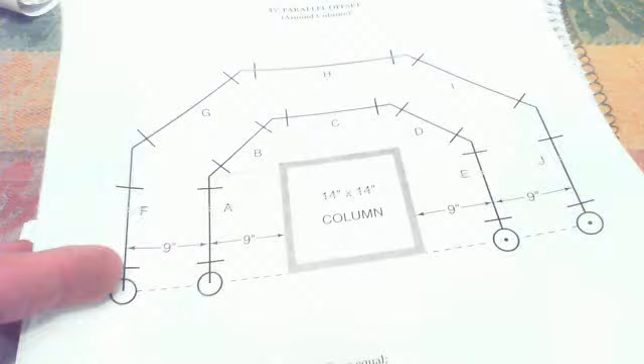So for this video I'm going to go over shop projects 8 and 9, and for this particular one it had a couple good things about it, in that some of these dimensions, you didn't have to go figuring out every single one individually, so some of them were equal, and that helped out a lot.

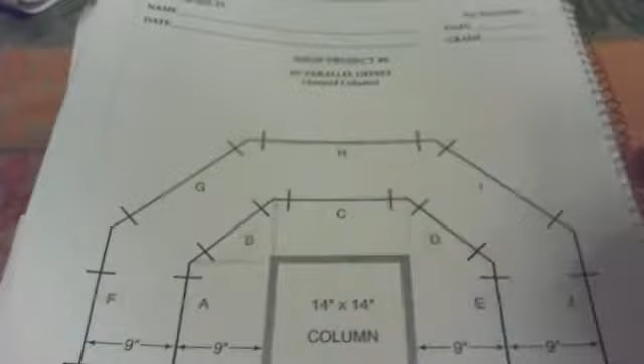So right off the bat, A, C, and E are 14 inches because the column lines up with the center line of the fittings, so therefore those guys are all 14. And then for B and D you take 9 inches. Okay, you got a 45 times 1.414, and that's how we get those answers there. So B and D are the same, 1 foot and 3/4 of an inch.

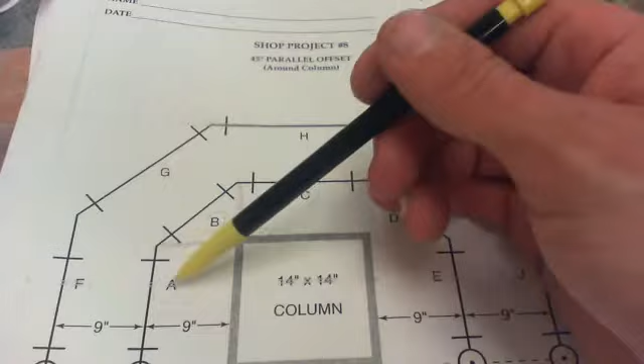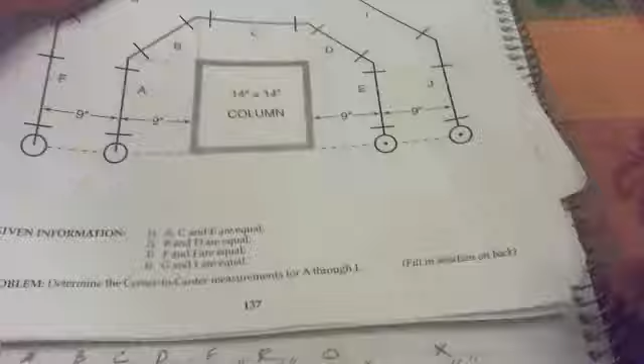Okay, and then we need to find a step ahead for these other ones out here, and of course you know that we gotta go 9 times 0.414 gives us a step ahead, and so for F and J we add 1 step ahead for those, right? So 14 inches plus 3 3/4. So 3 3/4 is a step ahead, and add that to A, you get F and J.

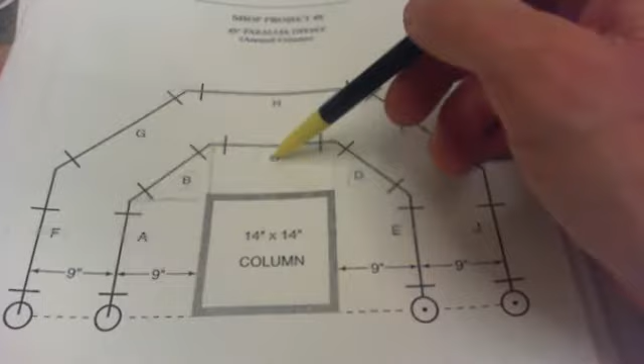And then for G, you take the step ahead times 2, 3 3/4 of an inch times 2, and add that to B, and that gives you G and I. And then for C, you take the step ahead times 2 and add it to C, and you get H. So that's that. That one's done.

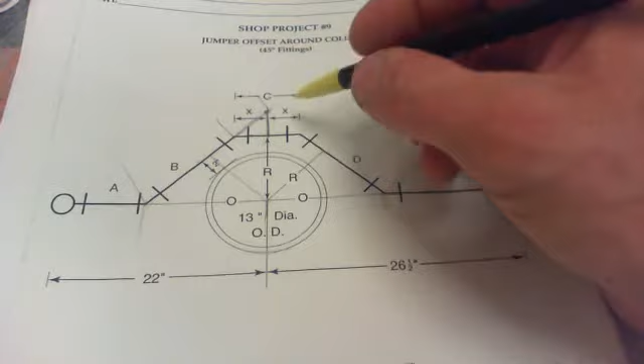And for 9, what I did here is I projected this line here up just to get the triangle, get the visual on the triangles, and then as far as the dimensions go, need to find R. You did that to start off, which 6.5 out to here for radius, plus 2, 8.5.

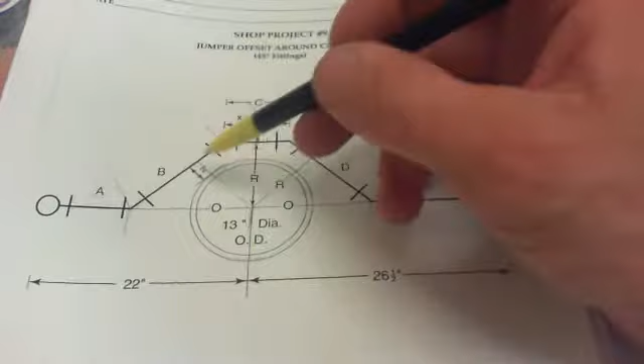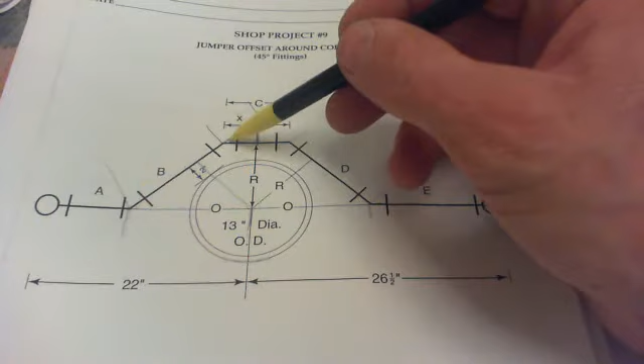And then again like the other one, number 7 it was, I went ahead and flipped this that way, just to envision it, so 8.5 there, A equals O, 8.5 there, and then it would be 8.5 to there, so that's 17, right? And then you would have to find out what this dimension is here to subtract it out of there, and in order to do that, you get X, which in the book they call C.

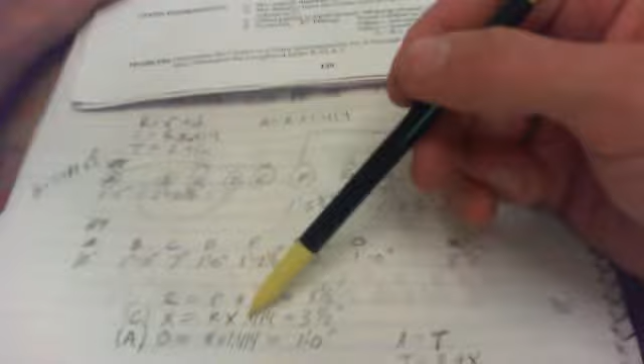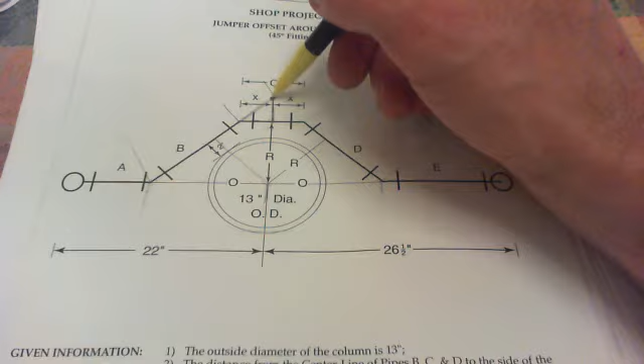So in order to find X, we take R times 0.414, and it equals 3.5 inches, right? So that was 3.5 there, 3.5 there, and 2 times 3.5 is 7. So there's your C. And then you take 3.5 inches for a 45, that's your offset or advance, and you multiply that by 1.414, and you get that dimension there, which I didn't have jotted down, but anyways, you subtract that from 17.

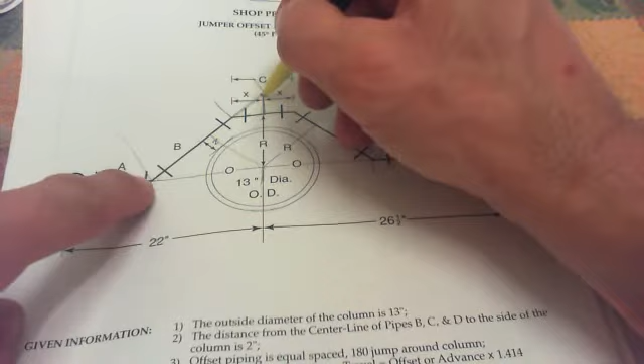So 3.5 times 1.414 gets you this dimension, and then you take that and subtract it from 17, which would be the overall, and then you would have the answer for B. And then you could do the same thing for D. It's actually the same method. So if you started on that side, it'd be the same thing.

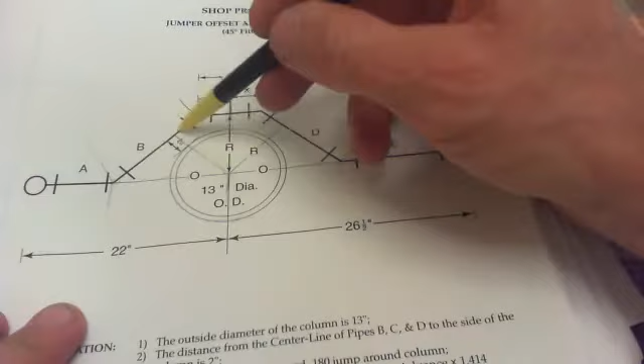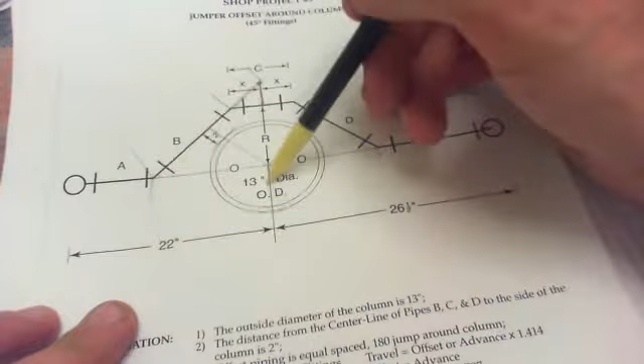And then in order to get O, again looking at this as far as triangles are concerned, you can see that that's a travel piece or a hypotenuse of this triangle here, and so that's R. So 8.5 times 1.414 will give you O. Okay, and then in figuring out what A is, you would subtract O from this overall dimension of 22 inches, and then you'd end up with A.

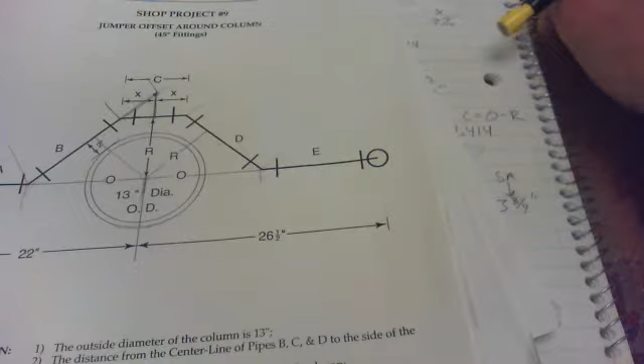And then same thing here for E. You'd take that dimension O, subtract from 26.5, and you get E. So it's as simple as that. Hopefully that answers your questions. There's what I got for numbers anyways on this.

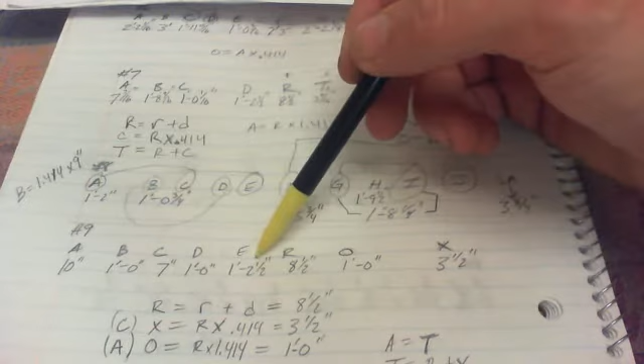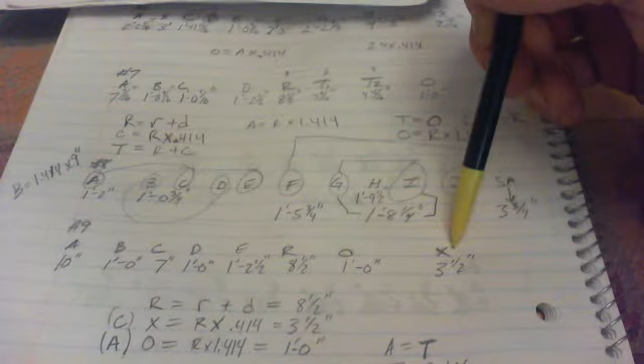I got 10 inches for A, a foot for B, 7 inches for C, a foot for D. E is 1 foot 2.5, R is 8.5, O is 1 foot, X was 3.5 inches. So if you got something different, or something didn't look right, let me know. Maybe you caught something I didn't.